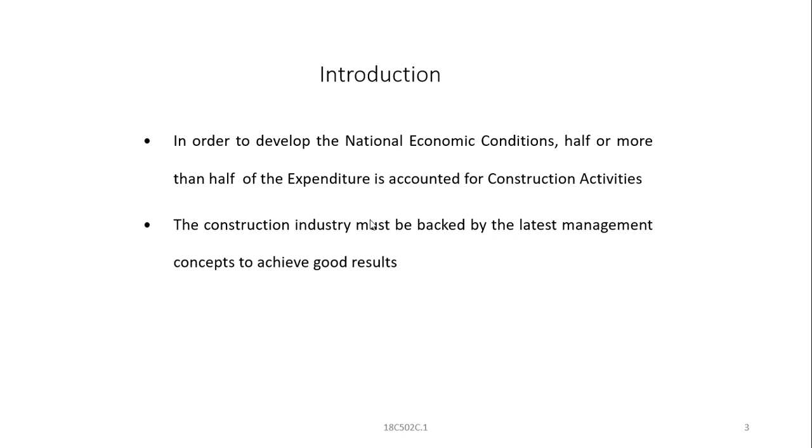Therefore, the construction industry must be backed by the very latest management concepts to achieve good results. We should not continue with worn out, old, outdated concepts. You must update yourself with the latest management concepts and tools required to achieve good results. That's one of the very important ideas you should possess when you try to understand construction management.

Any construction activity demands the necessity of managing speedy construction, control on quality, economy, and coordination. It generally demands management for speedy construction, quickness, time saving, without compromising on quality—that is quality control. Without being extravagant, it should always be economical in outlook, in terms of planning, execution, getting things done, purchase of materials, labor management in every aspect. You should have a quite economical outlook, and also coordination between money, materials, and machines must be there. To put it briefly in 4 points: speedy construction, quality control, economy, and coordination.

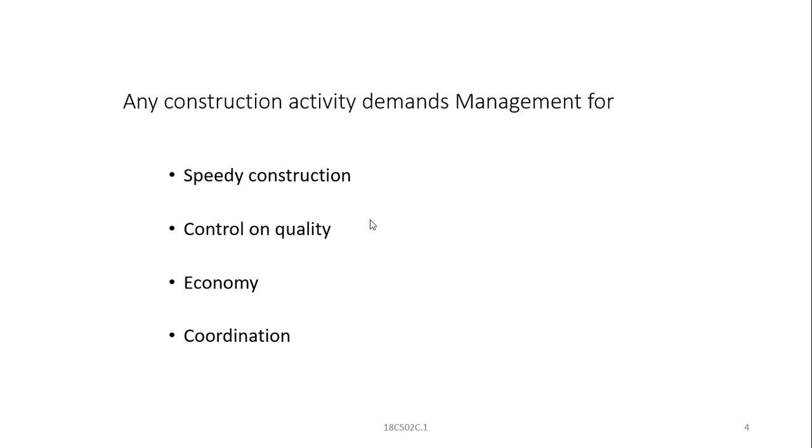Then we often use the word management. Now we are using the word construction management, whether it is construction or anything else—what do you exactly mean by management? The very word management presupposes that it is a creative and innovative force. The management itself is supposed to be an innovative, creative force, trying to secure maximum returns by the optimum utilization of resources and time, at optimum cost. This is the beauty of the management concept.

It's not only the creative and innovative force which is trying to secure the maximum returns. It has to focus on optimum utilization of resources and time, that too at optimum cost. So it's a creative and innovative force, and it should secure the maximum returns, undoubtedly. So two important points to keep in mind: optimum utilization of resources and time at optimum cost.

Efficient management brings the human and material resources like machines, materials, and money together, and requires coordination among various activities. Together means it's not just putting them together, but you have to see to it that there must exist beautiful coordination among money, materials, and machines. That's what it requires, coordination among various activities related to machines, materials, and money. That's another important concept you should keep in mind.

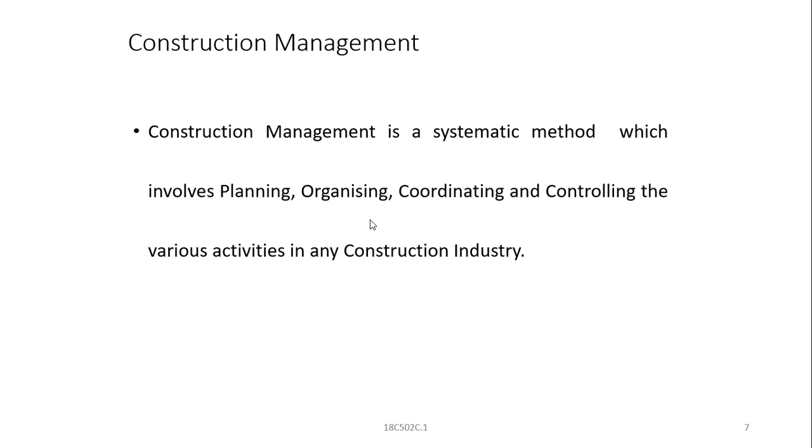Construction management is a systematic method which involves various activities such as planning, organizing, coordinating, and controlling the various activities in any construction industry. These are the major activities, and also the coordination among these activities between planning, organizing, coordinating, and controlling. These are four important words you should keep in mind as the components of construction management: POCC, that is planning, organizing, coordinating, and controlling.

So once again, to highlight the four important themes of construction management: planning, organizing, coordinating, and controlling. The first component, planning, we'll be discussing from the second part of the lesson. We'll discuss the definition of planning, factors involved in planning, and the importance of planning. But for now, is it made clear to you that these are the four important themes of construction management: planning, organizing, coordinating, and controlling? Please note down these four words.

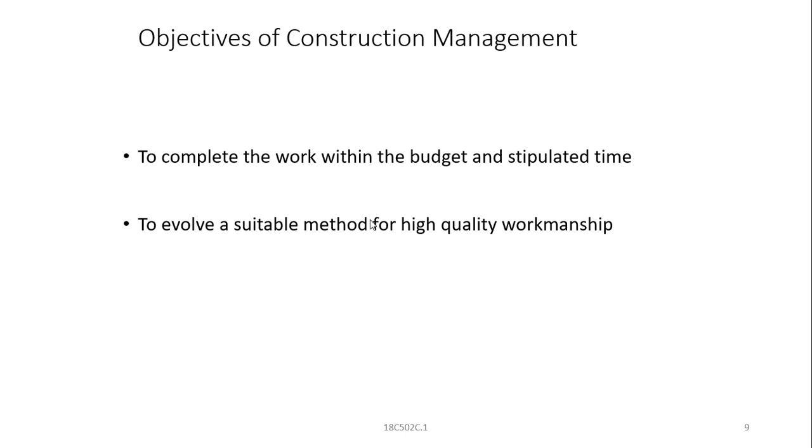And you should always motivate the people for optimum performance. See, human beings are called resources. When they give the outcome, that is output, in terms of optimum performance only, you can call them resources - resources in terms of labor, engineers, managerial professionals, whatever that is. What is required is there must be a kind of motivation for the people to be able to give optimum performance.

To complete the work within the budget and stipulated time, to evolve a suitable method for high quality workmanship, to motivate the people for optimum performance, and to create team spirit in the organization.

Motivation gets fructified, it gets real fulfillment when a team spirit is created in the organization. Within individuals, you call it motivation among individuals, and between two or more teams, in terms of teams, not individuals, there must be a team spirit in the organization.

Another objective of construction management is to take sound decisions by even the lowest management level. Taking sound, quick, wonderful decisions is expected not only at the managerial cadre level but at every level, in each and every task. That's why even at the lowest management level, decision making should be very good.

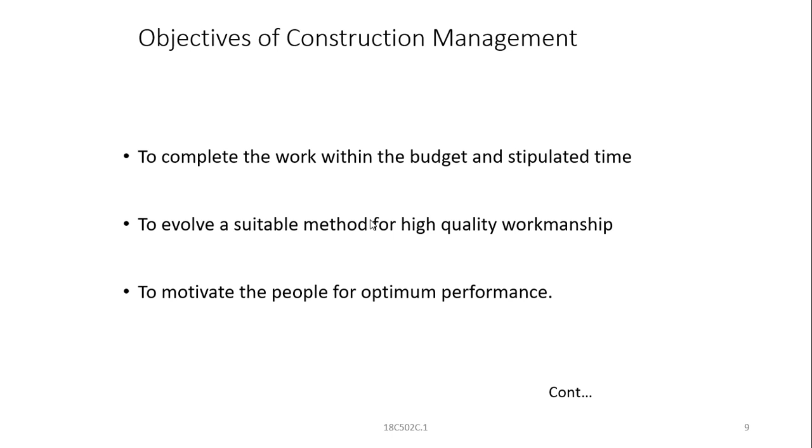We should also be able to provide safe and satisfactory working conditions for all personnel - that you cannot compromise on. So once again, the objectives of construction management: to complete the work within the budget and stipulated time, to evolve a suitable method for high quality workmanship, to motivate the people for optimum performance, and to create team spirit in the organization, to take sound decisions by even the lowest management level.

To provide safe and satisfactory working conditions for all personnel. These are, to be precise, the six objectives of construction management. There may be many more - you can take elements out of these six objectives, and you can be clear about many more objectives also. But these six objectives will summarize the main objective of construction management.

So, are we not supposed to know the advantages of construction management before jumping onto the theory or practice, practical principles, practical execution, whatever that is? You will do it well only when you know the advantages of construction management.

The first one is that construction management helps as a key for completing the given task. The very word management - we understood what management is, that it's a systematic method, and all the beautiful things discussed about construction management. Now, construction management helps as a key for completing the given task. It accelerates the rate of construction.

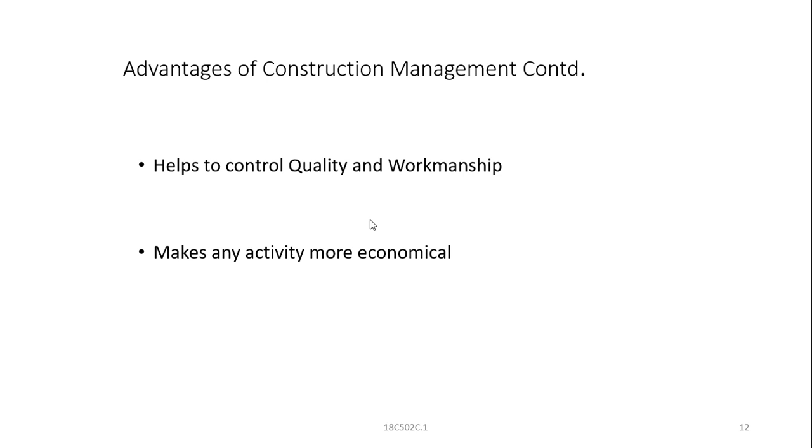Then what does an efficient management do after all? What does this management word or deed indeed mean? What is this as a management tool? An efficient management brings the human and material resources like machines, materials, and money together, and coordinates among the various activities.

What are the resources required for construction management? These are the four M's - M1, M2, M3, M4. First is men, then material, then machinery, and then money. Actually, the first thing is men. Then better to talk about material, because without material the machinery cannot function - it is operated only for the sake of material processing.

Money is required in order to buy the material and machinery, pay the men, and everything - so money is anyway an important thing. So: men, money, material, and machinery - the four M's any construction manager has to keep in mind. When he is able to coordinate - that's a perfect word for this - among these four elements: men, material, machinery, and money, that's the real construction management.

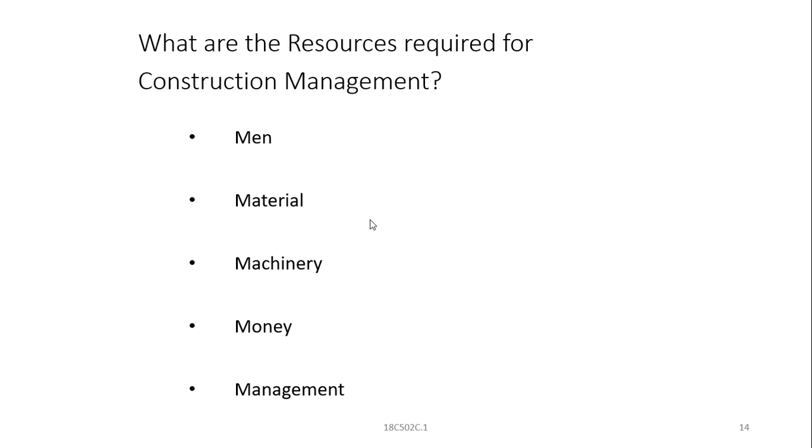And of course, that's what management is. Now, these four words I'm bringing to your attention because when you are asked to answer what is the necessity, why is construction management necessary, what's the purpose, you can put back in these four words.

It will be a fitting answer that construction management is necessary for speedy construction, for control and good quality, for optimum utilization of resources, and also the very important thing is time, optimum utilization of time, and any other resources also have to be optimally utilized without compromising on the quality.

And you should always focus on speedy construction, because optimal utilization of time involves, without compromising on anything else, going for the quickness of the construction. That means completing the schedules within time, within the stipulated time and within the budget. All these things happen. So why is it necessary?

You can at once reply that it is for speedy construction, for control on quality, for optimum utilization of resources and time.

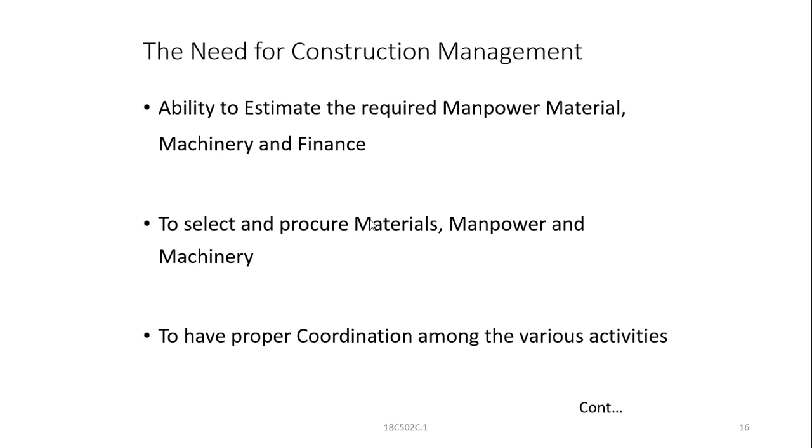To select and procure materials, manpower, and machinery. Earlier I said ability to estimate. The other one is ability to select and procure materials, manpower, and machinery, and also to have proper coordination among various activities,

and to sequence the various activities. Not that activities are there - you cannot do it without following a sequence. One is dependent on each other. It's like a symbiotic thing. One is dependent on each other, connected to everything.

Particularly in the construction industry, there are certain things you can perform anytime, but most of the things should be done in sequence - one task is completed, then only you can start another. Therefore, to have a good, meaningful sequence for the various activities involved in a project in a systematic way, you need construction management. And also to complete the work within optimum time and optimum cost, and to maintain quality of work, you need construction management.

And further, the important thing is to go for planning and programming of different works - that's nothing but a part of construction management. That's also where the need for construction management comes into picture. And to check the progress of work with respect to allotted time. All these things are involved in construction management.

Construction management allows you to take advantage of all these aspects. Okay, so let me just read them out once again so that you can remember them well: speedy construction, control on quality, optimal utilization of resources, optimal utilization of time.

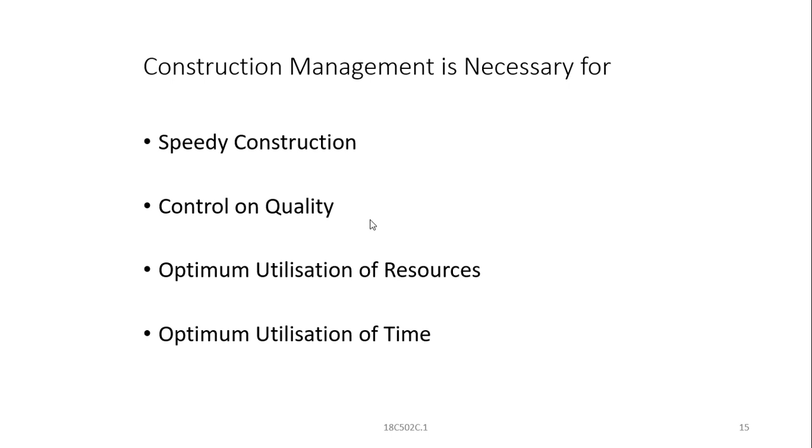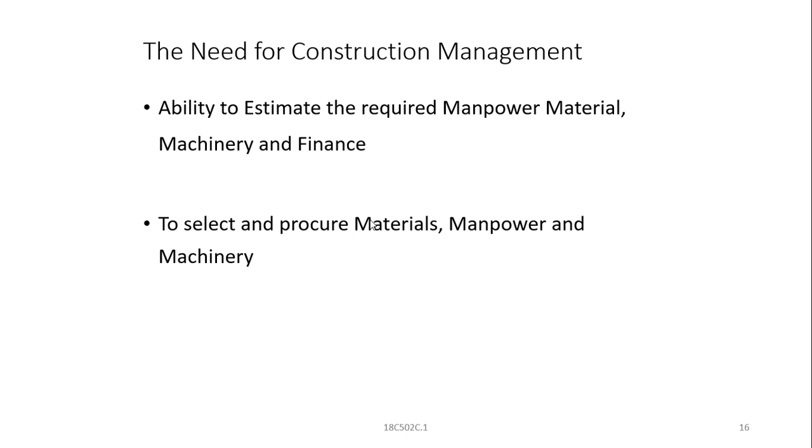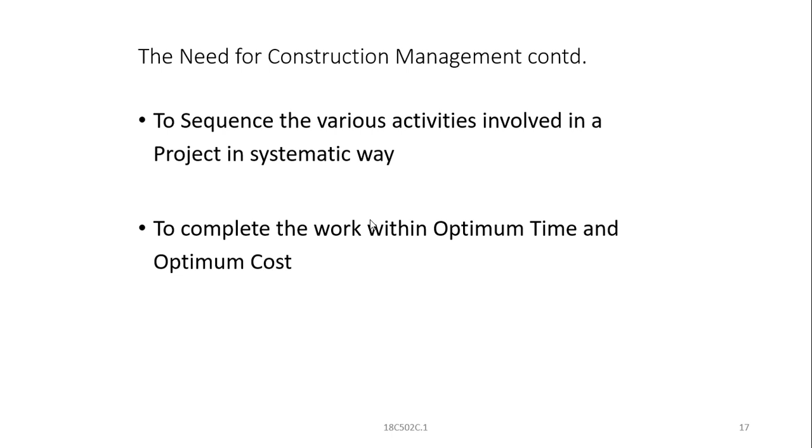And these things get reflected once again in further components like ability to estimate required manpower, material, machinery, and finance, to select and procure materials, manpower, and machinery, to have proper coordination among various activities, to sequence the various activities involved in a project in a systematic way, to complete the work within optimum time and optimum cost, and to maintain the quality of work, planning and programming of different works, to check the progress of work with respect to allotted time. These are many of the various essential points which make you feel that construction management is necessary.

Okay, then we will focus on the factors involved in construction management. As I told you: planning, organizing, controlling, and coordinating. Or you can say planning, scheduling, organizing, and controlling. These are the factors involved in construction management.

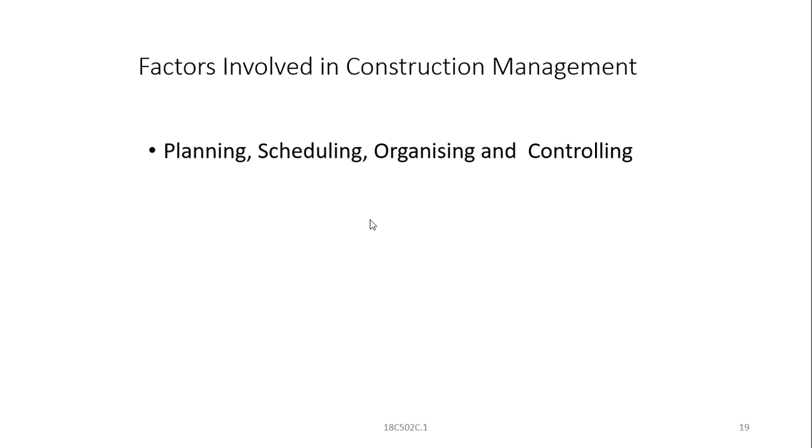And a very important factor involved in construction management is selection - it's a very important word. Selection of proper materials, its cost, including lead charges, and the magnitude of manpower and equipment. This is another important factor.

The first important factor is the processes such as planning, scheduling, organizing, and controlling. And also selection of proper materials, its cost including lead charges, magnitude of manpower and equipment, availability of material, future demand, and the probability of increase in cost.

Similarly, the appropriate time for using a particular equipment during construction. You cannot use a particular equipment whenever you want - there is a slot, a fixed time, an appropriate time at which you can go for using the particular equipment during construction.

And also, don't forget about the procurement of materials and machinery, which is important - without which you cannot go for the construction activity. And this important factor you should remember: don't forget the probable time delays due to natural conditions.

We said that speedy construction is important. So for speedy construction to happen without compromising on quality, sticking to the schedules, completing them within the stipulated time, you must be aware of the probable time delays due to natural conditions and also the skills required to finish the task. It's not the person, but the skill in him that makes him a skilled person.

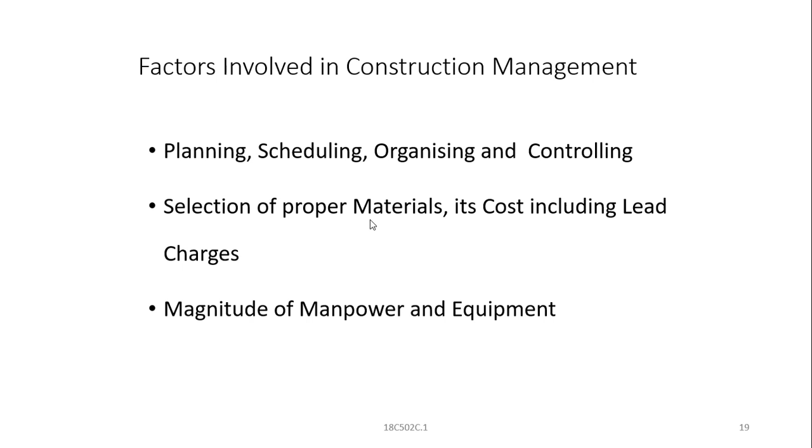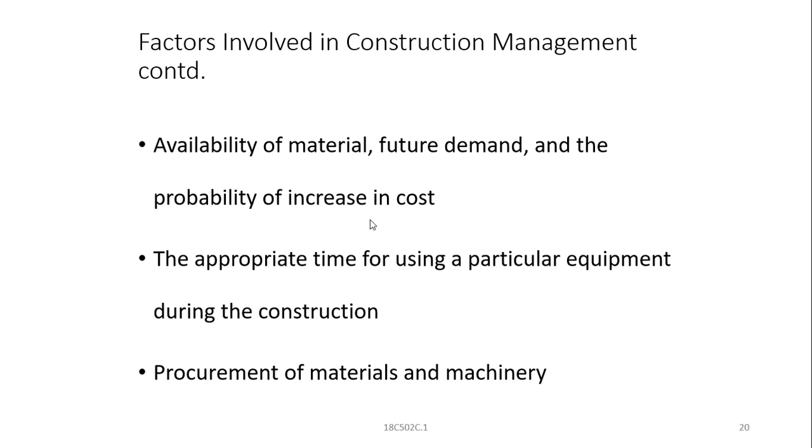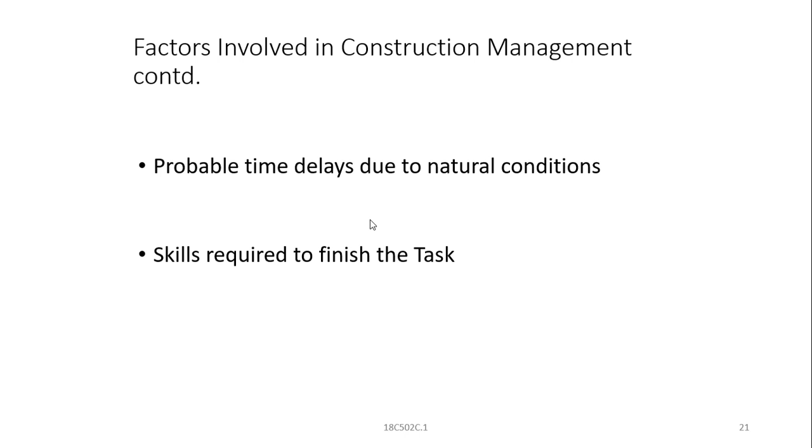Let me quickly read out once again: planning, scheduling, organizing and controlling, selection of proper materials and its cost including lead charges, magnitude of manpower and equipment, availability of material, future demand and probability of increase in cost, the appropriate time for using particular equipment during construction, procurement of materials and machinery, probable time delays due to natural conditions, the skill set required to finish the task, and coordination among different organizations. These are the several important factors involved in construction management.

Then let us focus on the scope of construction management, because there will be a scope for every subject and every person in whatever undertaking, or management, construction management involves. Within that scope only we have to work. It may be very wide sometimes, and if you do not know the wideness of construction management, you may just work in a very narrow environment, narrow attitude, narrow outlook, or narrow thinking. So you are supposed to know in the beginning itself what is the scope of construction management.

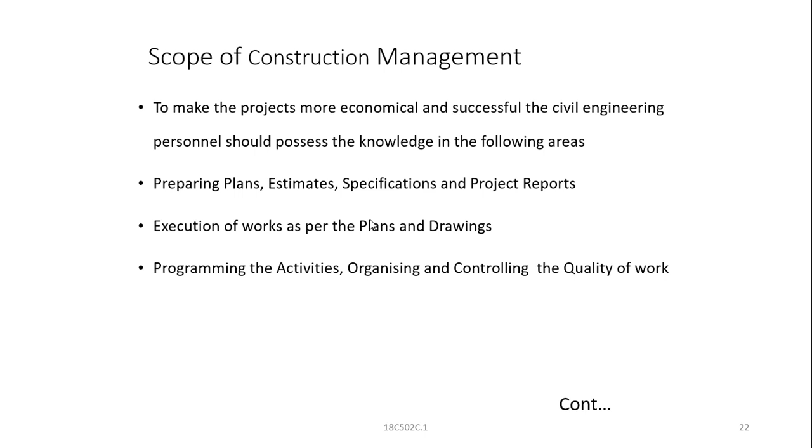To make the projects more economical and successful, the civil engineering personnel should possess knowledge in the following areas, which gives you a reflection of the scope of construction management: preparing plans, estimates, specifications and project reports; execution of works as per plans and drawings; programming the activities; organizing and controlling the quality of work; organizational setup and duties of various officers; scheduling of works through management techniques such as CPM and PERT.

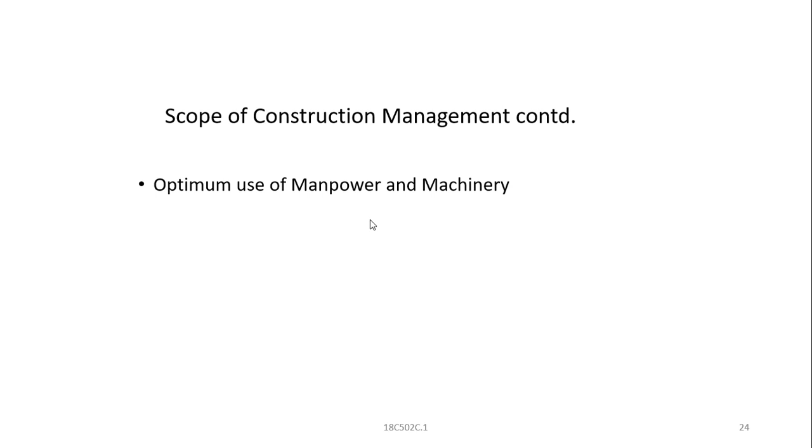And knowledge of contract systems, methods of execution and accounting. All these things give you an indication of the scope of construction management, along with optimum use of manpower and machinery, good labor relations and labor welfare, and knowledge of industrial psychology and labor acts. You are supposed to know something about labor acts also, otherwise you may have to face so many problems. Industrial psychology, labor acts, labor relations, labor welfare, optimum use of manpower and machinery—all these are very, very important, which form the scope of construction management.

Now let us shift forward in our learning. It's not mere shifting—you're climbing up the ladder from the definition of construction management, factors involved in construction management, the necessity of construction management, and from that now you are going to understand a step further.

I think you can say the very first part of construction management is nothing but planning. Very important word, that is planning. The process of determination and formulation of the different steps and events in a particular task—that is planning. In whatever aspect, this definition holds good: the process of both determination and then immediately the formulation of the different steps and events in a particular task. That is planning.

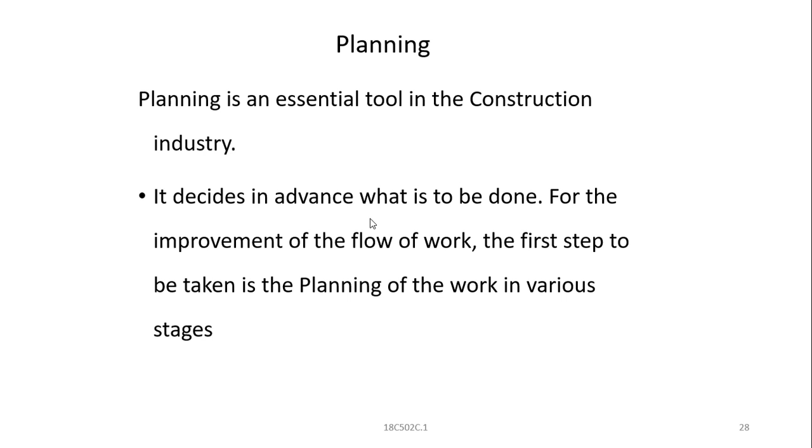Otherwise, you cannot expect the work to be completed in time. For all the words we use, like coordination, everything, the first and foremost step that is essential to be taken in advance is the planning. So for the improvement of the flow of the work, for the execution of the flow of the work, the first step to be taken is the planning of the work in various stages.

Conditions necessary for the preliminary planning. What are the conditions which are necessary for the preliminary planning? Knowledge of work to be done and its necessity. Without possessing the knowledge for the work which has to be carried out, and without realizing the necessity of the work, you cannot be motivated, or you cannot even initiate what is to be done. Therefore, what are the conditions necessary for the preliminary planning? Knowledge of the work to be done and also its necessity.

The amount of money to be spent and the best way of doing it. It's not enough that how much money is to be put into the process, how much money has to be spent, that too meaningfully, that is economically. The best way of doing it means economically.

And then knowledge of the capacity of the establishment. You should know the capacity, you should be knowledgeable about the capacity. You should not only have the capacity, you should know your capacity. There is knowledge of the capacity of the establishment. Similarly, knowledge of the preferential order or the sequence of doing it, of executing it.

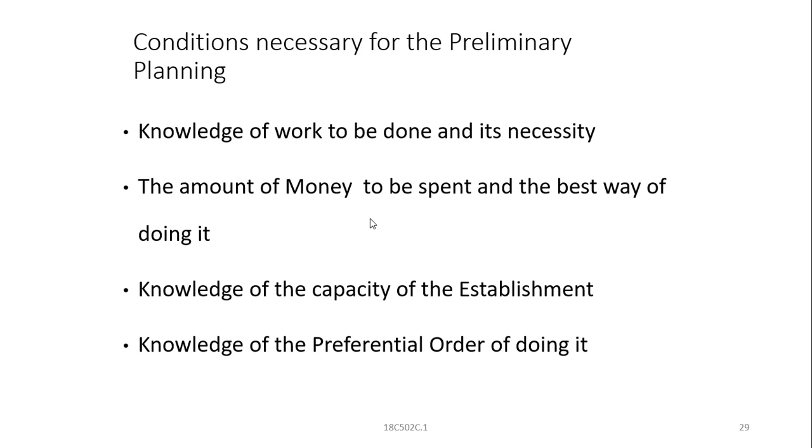Okay, these are the various conditions necessary for the preliminary plan: knowledge of the work to be done and its necessity, the amount of money to be spent and the best way of doing it, knowledge of the capacity of the establishment, knowledge of the preferential order of doing it.

Now, the data required for planning: need for proposed project, benefits expected after completion, details of site survey and soil, availability of material, manpower, and machinery, and also funds available, communication facilities, weather conditions in the locality.

All this forms the data. It's very important that you should have this data. Data, it's not by title, but the complete details of it should be in your hand: availability of water, power, etc., dependability of sources of material available and their distance from the site, factors which may cause delay, types of skills required, etc.

Yes, we'll revise once again. So now we are focusing on the data required for planning. Very, very important concept. So you should have data about the need for the project, proposed project.

You have to be able to justify why this project is necessary, the need or necessity, the purpose, why it is being done, why this particular project has to be initiated, should be made in the form of a proposal to the government, why we should request the budget for that. Is it a drinking water project or a road project or any kind of infrastructure project for that matter? Why so? Since how long have the people of that particular area been suffering because of the non-availability of this project, a road or water or anything.

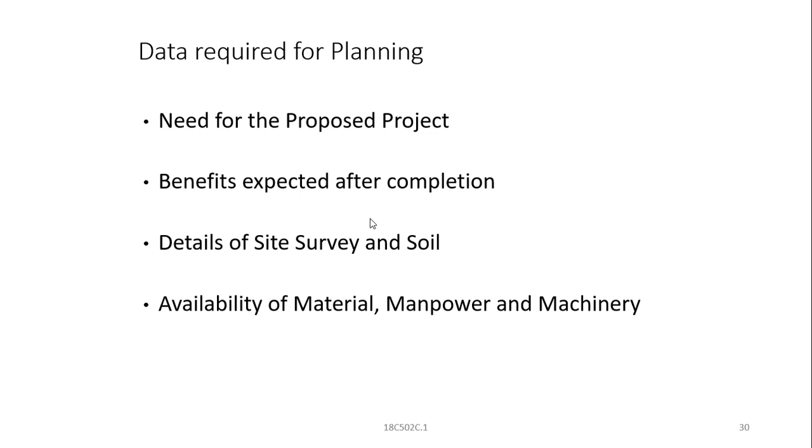Do you have the people to operate them? Several things: at least availability of material, manpower, and machinery are required at this planning stage. Then there's vitamin M, that is funds availability, and the communication facilities in terms of roads, at least the approach road, because you should bring materials to the site and unload them at the appropriate location.

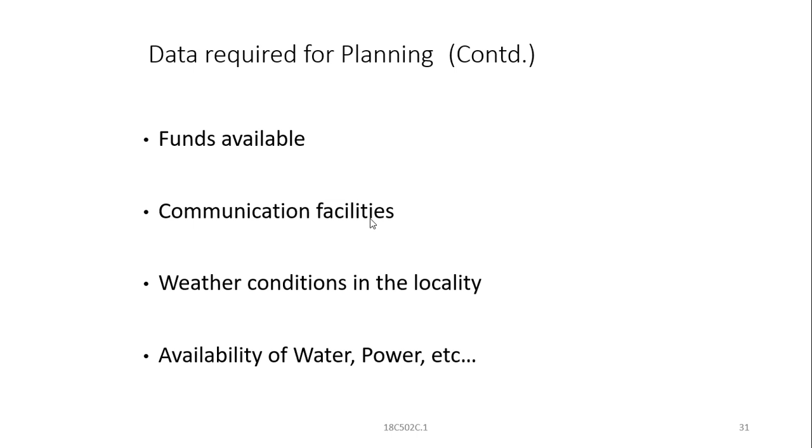You need all communication facilities, and you should have an understanding of weather conditions in the locality—is it too hot, does it involve too many rains in the rainy season, or other climatic variations? Also have ready-to-reckon data about funds availability, communication facilities, weather conditions, and the availability of water and power, very important resources.

Finally, dependability of the sources of material available. You may say materials are available, but can you rely on them in terms of quality, the way they are made available, and the distance from the site? How much time does it take? If the project is to be completed very fast, you should have your material at your disposal right away, so what are the factors which may cause delay?

Delay factors—you should have data about it also. And the types of skills required, you should not be vague or ambiguous; you must have a very clear, specific idea about the types of skills required. You should form them as a document, so it forms the data required for planning.

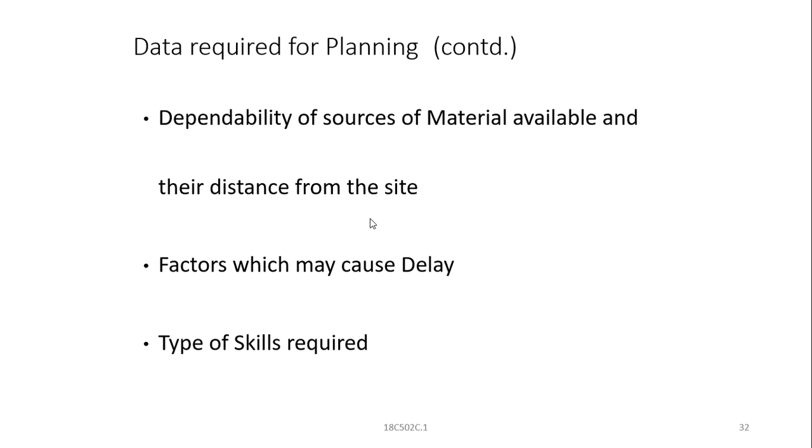So shall we proceed to the importance of planning? You can easily expect it, there's some common sense involved. It helps in anticipating the future course of events, using some technical know-how, and as a human being, as a social being, with age you can easily imagine and write them down.

Planning helps us anticipate the future course of events, prevents wastage of time, money, and material, and ensures proper utilization of resources. It further helps in deciding the organization needed to achieve those objectives.

It gives direction and attention on objectives. Further, it helps to offset change and uncertainty, to eliminate risk and losses. If there is any uncertainty, this planning will help you offset the change and uncertainty, so that you can eliminate risks and losses.

This planning helps you lay down the procedures, policies, objectives, and operations—everything can be laid down. It also helps avoid all the bottlenecks to carry out the work smoothly, because with all the data you have, it will aid you to avoid, eliminate, and remove any bottleneck in the way of carrying out the work smoothly.

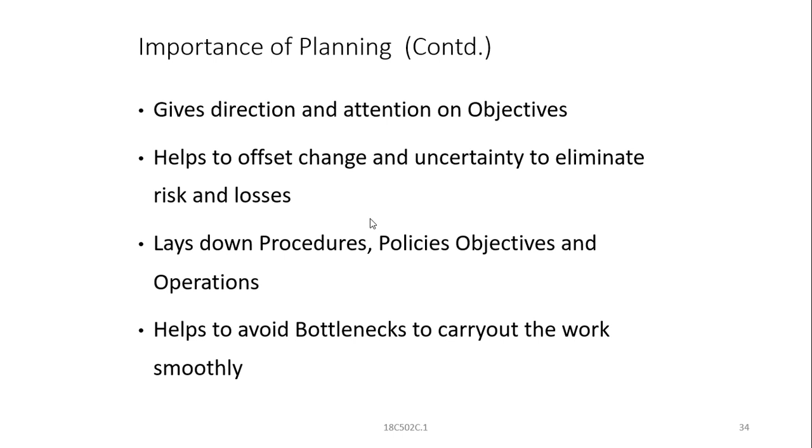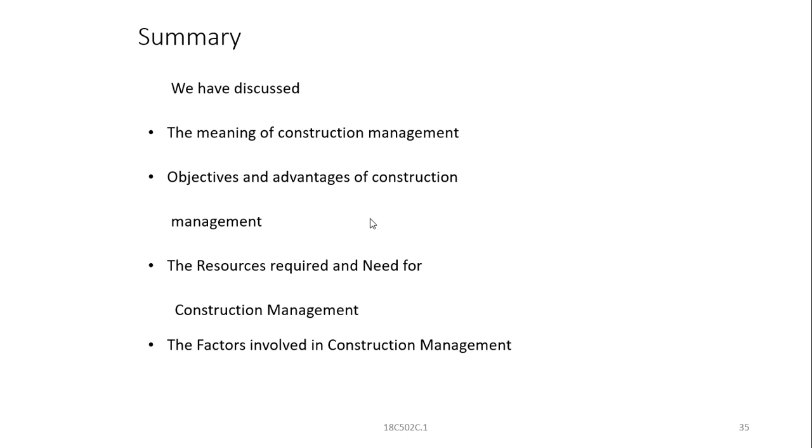In this lesson, what I wanted to convey is the introductory and conceptual understanding of construction management. We also discussed the important concept of planning, preliminary planning and its importance, the conditions necessary for planning, and the data required for planning. All these things we have discussed, is it not?

So let us consolidate our discussion with some quiz questions. I may ask you 5 to 6 quiz questions so that your understanding in this lesson gets consolidated. It's a beautiful way of interaction. You should also be allowed to think, try to recall, recollect, remember, and recapitulate whatever you have learned in this lesson.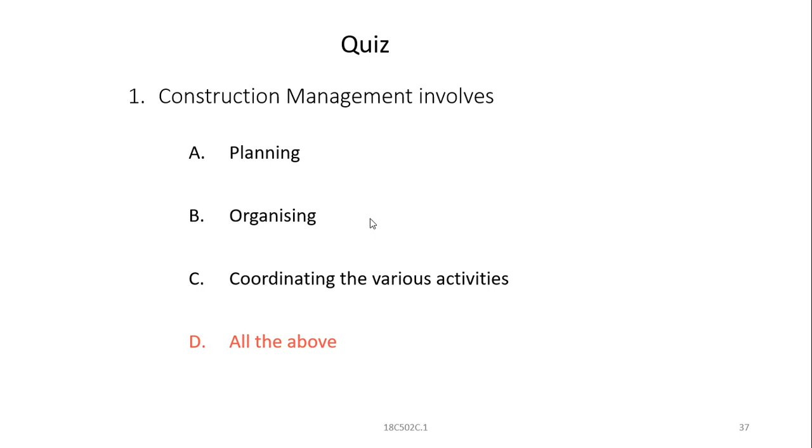Does construction management involve only planning? Only organizing? Only coordinating the various activities, or all of the above? If we have discussed this, try to recall the answer. Yes, it involves all the activities: planning, organizing, coordinating, controlling, scheduling, and several others. So, all of the above. The knowledge of construction management is necessary.